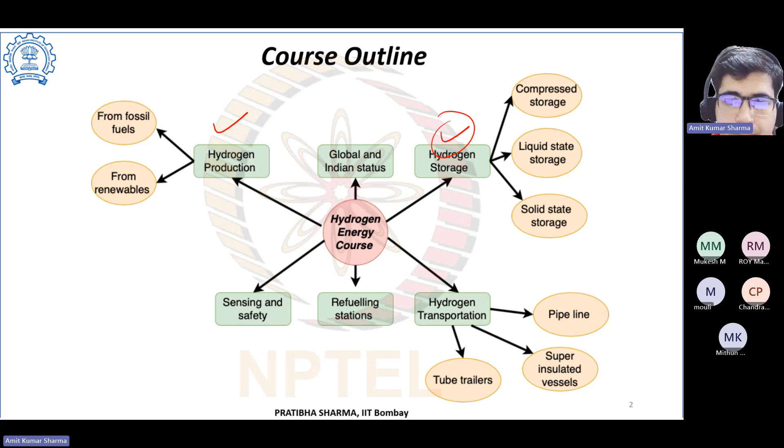Question number 1: what is the density of liquid hydrogen at 1 bar? A) 80.1 kg per meter cube, B) 65.3 kg per meter cube, C) 70.9, D) 0.089.

0.089 — okay, D, we have one answer. Anybody else? So it's C, 70.9. Nice, so we have another answer. Now we have two answers, so you should both think about the question because we have two answers, but only one is correct. Yeah, it is C. Okay.

I think you have identified your mistake. Correct, yes, it was liquid. So always read the question carefully. What is the density of liquid hydrogen? It is mentioned liquid hydrogen at 1 bar. So what about option D? What is that density for? Gas, yeah. So this one will be for the gas at 1 bar, or you can say NTP. But it is mentioned about the liquid hydrogen, so we know that this option is not correct.

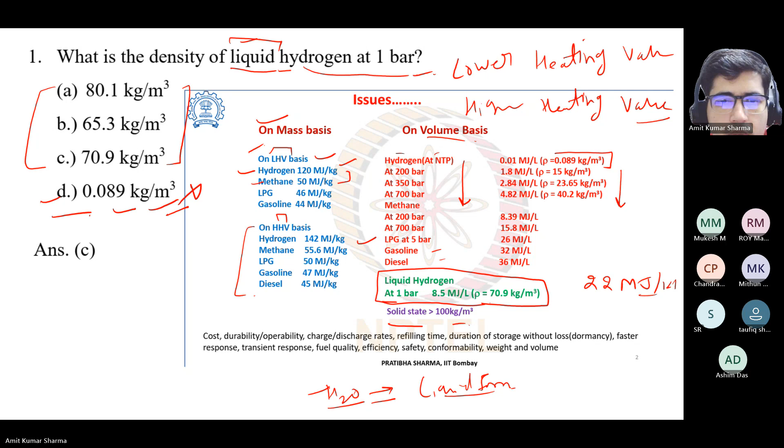Similarly, you can see the density for gasoline and diesel. For liquid hydrogen at 1 bar, the density is 70.9 kg per meter cube, and for solid state it is 100 kg per meter cube. The density of gasoline is 32 megajoule per liter and 36 megajoule per liter.

So what do you think from this mass basis and volume basis? What is your understanding after getting the knowledge of density on mass basis and on volume basis? What do you think about hydrogen now? Anybody? The data is in front of you, so you know the calorific value on the mass basis and density on the volume basis. So what do you think? What is the understanding based on this data?

Handling hydrogen, at NTP or any other pressure, is not as efficient as any other comparative liquid fuel. Okay, anybody else?

On the energy side, when the pressure increases from 200 to 700 bars for hydrogen, the energy also increases on a volume basis, per liter basis. At 200 bar it is 1.8 megajoule, at 700 bar it is 4.82 megajoule per liter, and density also increases.

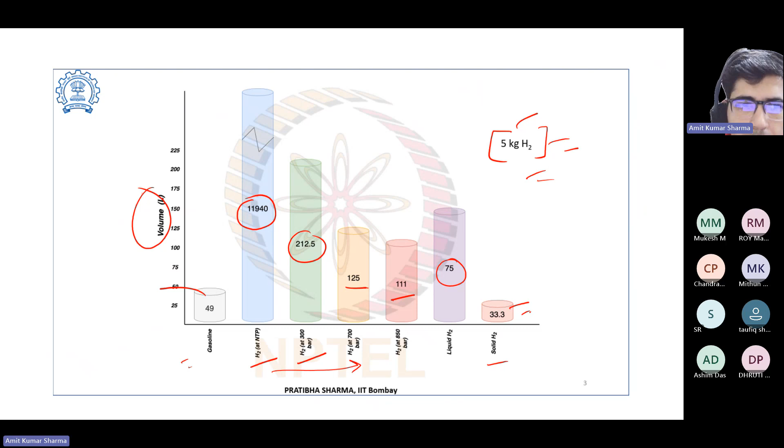If you have hydrogen at 300 bar, it's reduced to 212.5 liters, then 125, then 111, and liquid hydrogen it's 75, and solid it's 33.3 only. So the volume is reducing - as you increase the pressure, the volume reduces and you improve the density. But still, compared with gasoline, it's much lower.

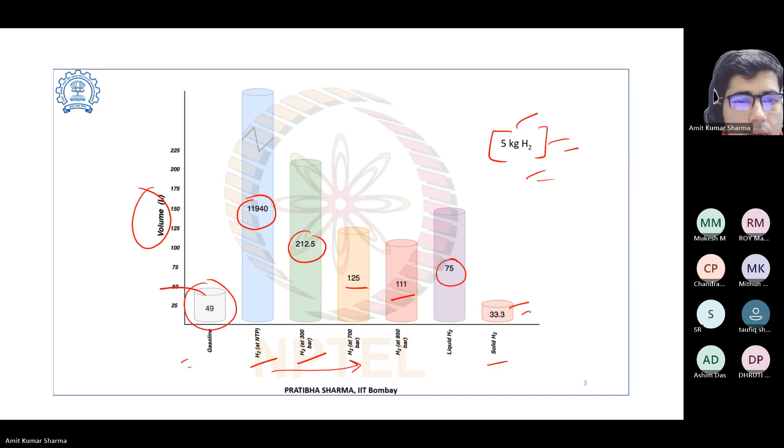So now question number 2: the operating pressure range for storing hydrogen in salt cavern are selected with reference to which of the following pressure - lithostatic, atmospheric, hydrostatic, or vacuum?

Sir, lithostatic pressure. Okay, we have one answer. Anybody else?

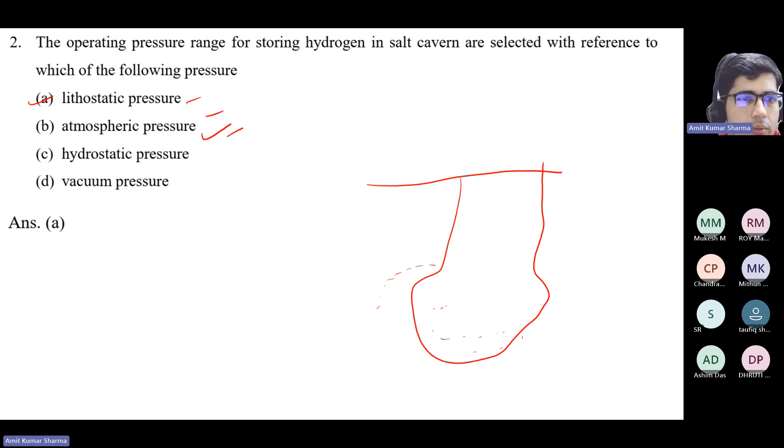So the correct answer is A, lithostatic pressure. As we are storing in the salt cavern, what is the meaning of lithostatic pressure? Atmospheric pressure is 1 bar, roughly 1.01325 bar, while lithostatic pressure is the pressure exerted by the salt material or sediments - that solid material applies pressure to the stored gas. Because suppose this is the earth's crust and we are storing hydrogen here, all the rocks surrounding it create some pressure, similar to hydrostatic pressure in fluids. That is lithostatic pressure. Atmospheric pressure we all know, vacuum pressure we know, so the correct answer is A.

So now let's go through some history of underground storage. In 1915, Ontario gas field was used for natural gas. Underground hydrogen storage has similarities with underground natural gas storage, because UHS is similar to natural gas storage. In 1976, there were no insurmountable problems with UHS, similarly in 1979 and so on. Recently in 2020, Shi et al.

investigated the potential of storage of a hydrogen and natural gas blend into a depleted gas oil reservoir, which has already been used for natural gas storage, through a series of experiments. So recently they did some experiments to use a depleted oil and gas reservoir, which was earlier used for natural gas, to store hydrogen.

Also in 2020, Narayanamoorthy et al. proposed a normal wiggly dual hesitant fuzzy set for UHS site selection based on five criteria, including technique of operation, investment cost, social, economic, and risk factors. So you can search these papers from these authors to read more about recent developments in underground hydrogen storage.

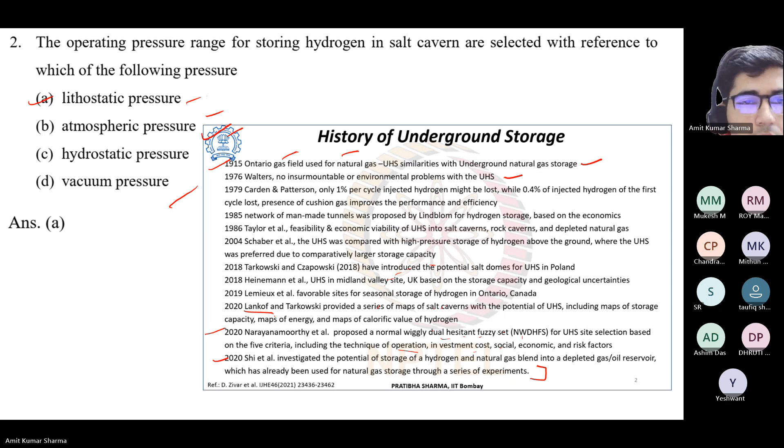So what are the advantages and disadvantages of underground hydrogen storage? Advantage: we can have long-term, large-scale storage because underground we have so much space available, like in oil wells, salt caverns, and all. So we can store a lot of hydrogen. It's economical because the space is already created there.

You just need to do some extra work, and it's economical in the sense that if you wanted to create that much space on the earth's surface, to maintain the pressure, to develop it and all, it would need huge investment. But for underground hydrogen storage, it's economical.

It's a proven technology. We have seen that since 1915 we have stored natural gas and all. So it's proven technology, it can give good performance, less microbial contamination, and it's safe.

It also has some disadvantages: integration challenges, need for high purity hydrogen. Because if you are storing hydrogen in a depleted oil well, the surface of that well can contaminate the hydrogen. There can be some reactions.

Availability of such geological structures - we all know it is not available everywhere, so it is a big issue regarding availability. Also safety: you need to monitor it properly, and have a proper regulatory framework, because if you are storing a huge amount of hydrogen, there will be some regulatory framework, so you need to comply with all those frameworks.

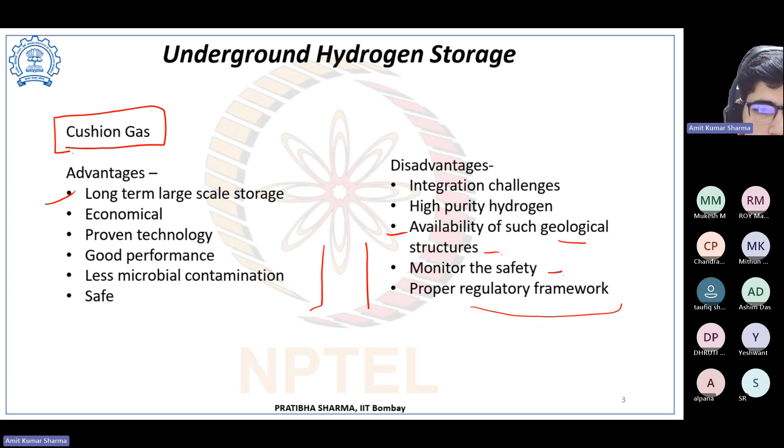Right, right. So basically, suppose this is your underground cavity where you want to have hydrogen storage. Earlier it was used for, like, a coal mine or an oil well, or a salt cavern. If you directly pump the hydrogen inside, the hydrogen will fill this cavity. Then maybe it will react, because these walls have some kind of chemical, so they can react.

There can be some biochemical reaction, maybe some microbes also, because it's a very old geological structure, so maybe there are some microbes, some kind of chemical, so there can be reactions. These reactions can introduce impurities into the hydrogen, so when you pump it out, those impurities can also come out. And also, we know the challenges with hydrogen storage.

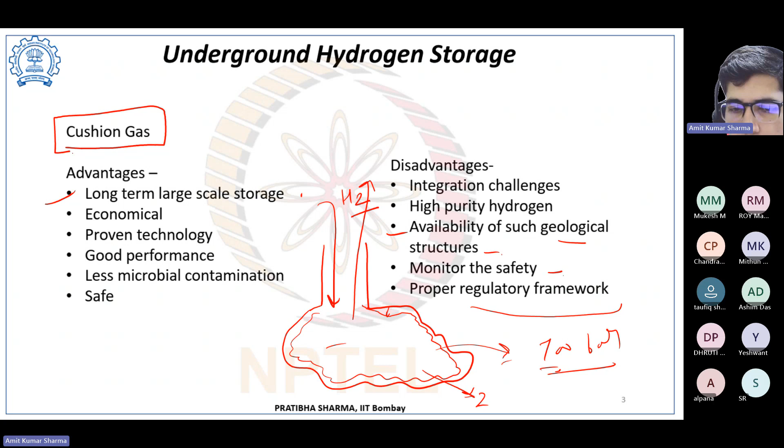Okay, so we need to compress it to a very high pressure. Suppose it's totally empty and it's a very large space. To have 700 bar pressure in that large space, you need to pump so much hydrogen. But suppose you don't have that much hydrogen, then this space won't be able to maintain this pressure. Maybe it can only, suppose you are having x tons of hydrogen, so you pump x tons of hydrogen in this cavity, it can go up to 200 bar only. But you need to have it at 700 bar, that's economical to you. Otherwise you need to compress it again.

So then what can we do? To avoid these disadvantages like contamination, and to maintain the pressure, we can first add a different gas in this cavity. We can add nitrogen. So first fill this cavity with that gas, so that gas will occupy some space and some volume.

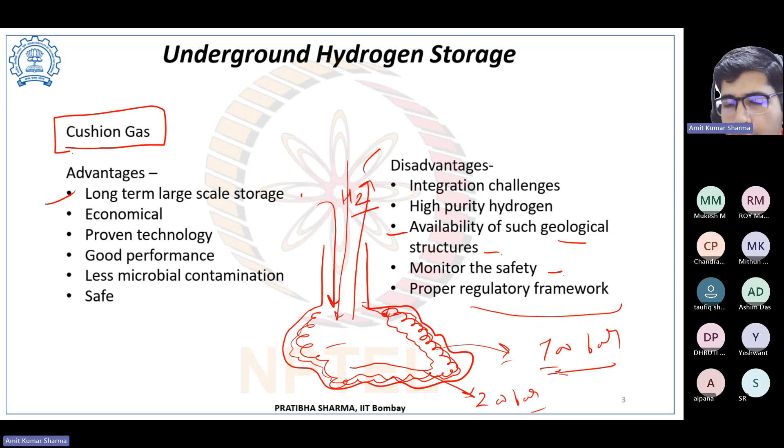Now you can introduce hydrogen. Hydrogen is a lighter gas, so the other gas will remain near the boundary, because it's heavier compared to hydrogen. So hydrogen will be in the middle. Now you can compress it, because already so much space has been occupied with nitrogen or any other cushion gas. So you need a smaller space and can pump more volume of hydrogen. Now you can go up to 700 bar or larger. So this is the benefit of cushion gas, and it also helps in the pumping, since you have larger pressure it will help, and it has some other benefits too.

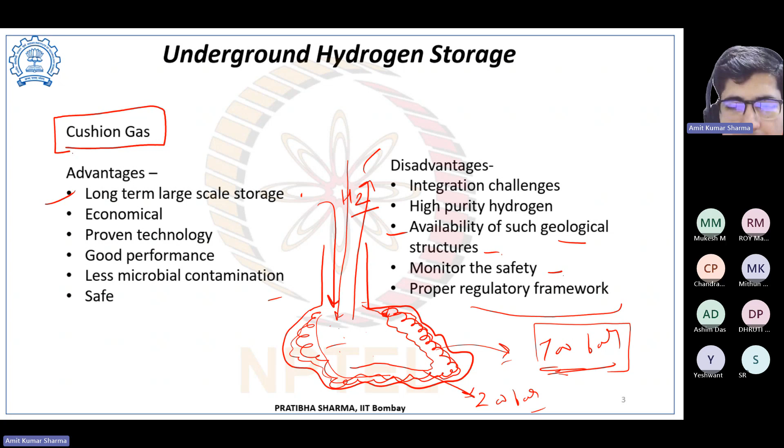So when we are having underground hydrogen storage, there are some parameters for site selection, like we need to see the capacity, security, physiochemical, geo and biochemical challenges, and economics. We need to look at these.

What are the challenges? Location suitability, capacity, reaction and contamination as we discussed, hydrodynamics, leakage—hydrogen is very light so there can be some leakage also—water production, environmental issues, and efficiency of process. So these are the challenges for underground hydrogen storage.

So further research and upscale pilot projects are needed. As we have seen in history, recently in 2020, two or three authors have done some experiments on hydrogen storage, and prior to that others have already done experiments. So still, more research is needed in this area.

Hydrogen storage site selection methods need to be expanded to less well understood regions. Improved monitoring procedures are required to assure that hydrogen can be stored safely, so we need to improve those monitoring procedures. Realistic simulation models are needed to predict the performance of hydrogen storage, and further refine to model the process completely. So these are the areas where we need to work.

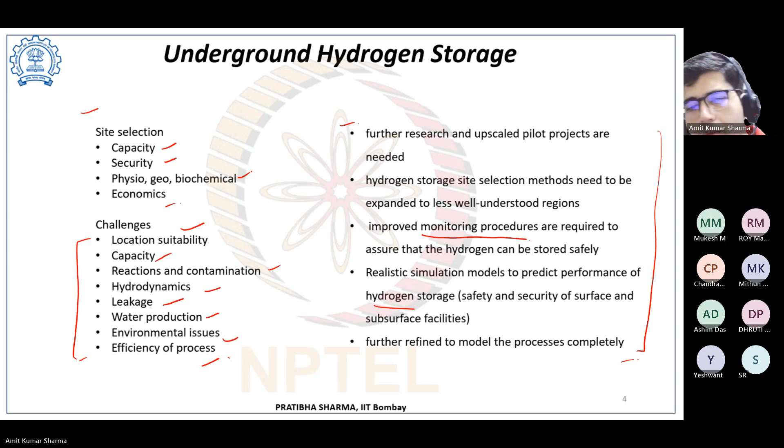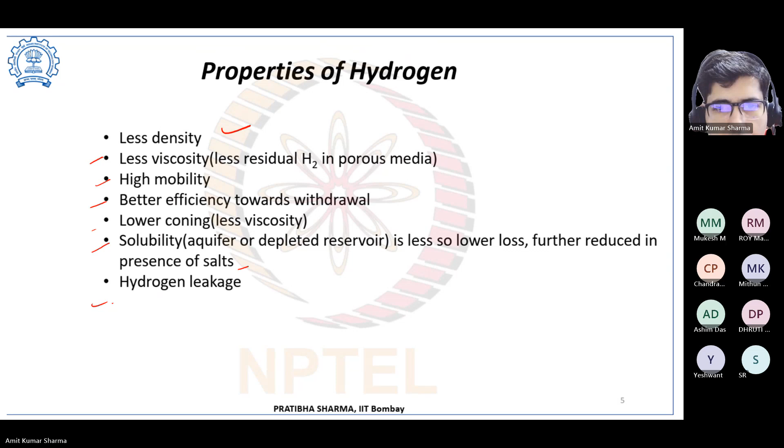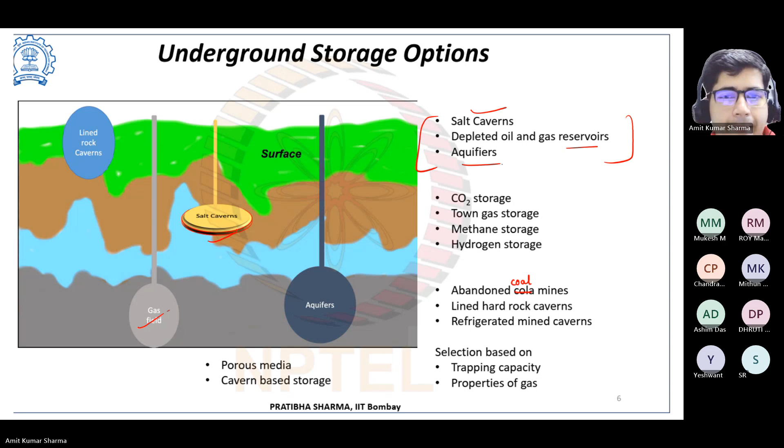So you can see the options for hydrogen storage: salt caverns, depleted oil and gas reservoirs, and aquifers. These are the locations where we can store hydrogen. These locations are not only used for hydrogen storage, but they can also store CO2, and be used as town gas storage and methane storage. We can also use abandoned coal mines, lined hard rock caverns, and refrigerated mined caverns. So the selection of location will depend on the media, the cavern based storage, trapping capacity, and properties of gases.

The property of gas is important because, as discussed, you have a layer and you need to study that. Suppose if you are storing a gas that has direct reaction with the inner surface of your cavity, then that can contaminate the gas. So you need to look into that, you need to understand the properties of the gas.

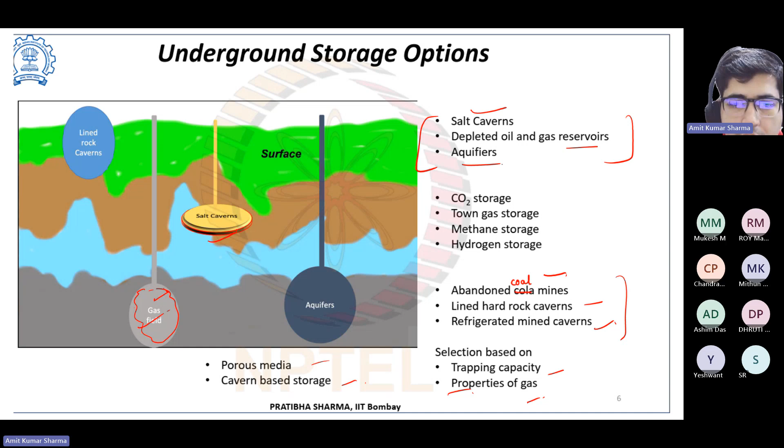Now let's go through the salt cavern. It's mostly a cylindrical, artificial pit in thick underground salt deposits, built from the surface by injecting water in a controlled manner into a well in the salt rock. This is called solution mining. Based on the requirement and technical possibility, it can be built up to 2000 meters deep, with 10 lakh cubic meter volume, 300 to 500 meter height, and 50 to 100 meter diameter, enabling storage of large quantities of gas. Pressure during operation lies in the range of 30 to 80% of the lithostatic pressure.

The specific geological conditions such as tightness, the favorable mechanical properties of salt, and its resistivity to chemical reactions. So we need to see this. Suppose your salt is reacting with the gas, then it's not good, so you need to see that also. Viscoplastic attributes of evaporitic rocks help with their better sealing function.

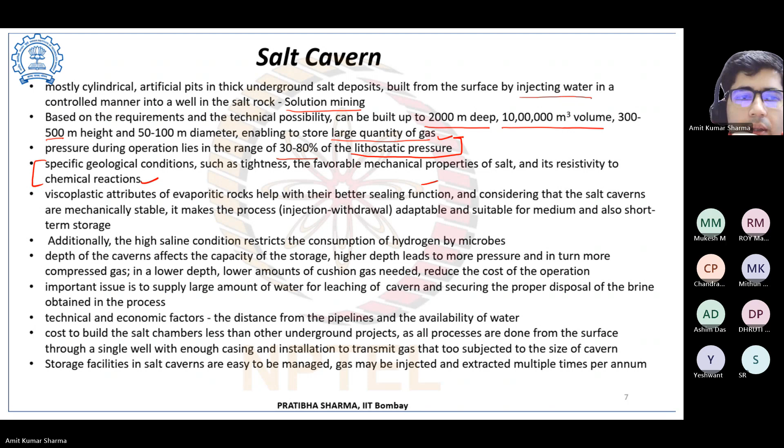Because hydrogen is a very light gas, if there are small cracks in the rock, and that crack is connected to some other cavity, so there can be some leakage. So you need to also consider that.

Additionally, the high saline condition restricts the consumption of hydrogen by microbes. Depth of the caverns affects the capacity of storage. Higher depth leads to more pressure and in turn more compressed gas. Because we know if we are storing hydrogen, we need to have more pressure. So higher depth can have more pressure because higher depth will have a higher lithostatic pressure, and we know that we can go up to 30 to 80% of that pressure.

In a lower depth, lower amounts of cushion gas needed reduce the cost of operation. So an important issue is to supply large amounts of water for leaching of the cavern and securing the proper disposal of the brine obtained in the process.

Technical and economic factors: the distance from the pipelines and the availability of water, cost to build salt chambers less than other underground projects, as well as all processes done from the surface through a single well with enough casing and installation to transmit gas, subject to the size of the cavern. So these things are about the salt cavern.

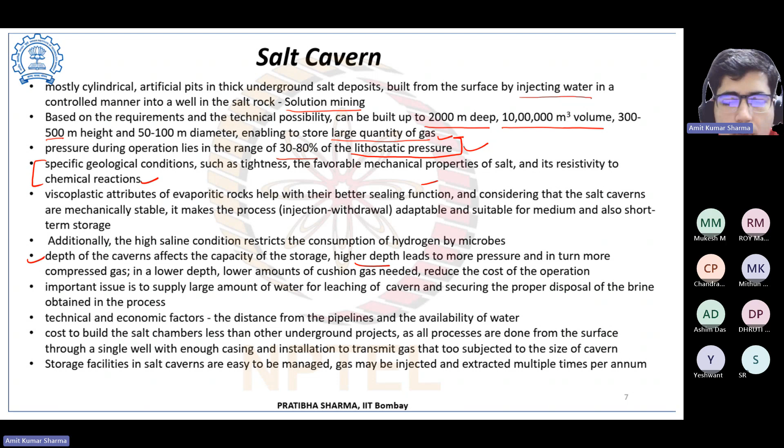Now the aquifers. These are the porous and permeable media where their pore spaces are filled by fresh or saline water, found all over the world, making them a good option for underground hydrogen storage. Now there are some conditions for deep aquifers.

It should have good reservoir characteristics of the host rock. Second, the presence of an impermeable layer to prevent migration of the gas being stored. So there should be an impermeable layer, otherwise there will be leakage of the gas.

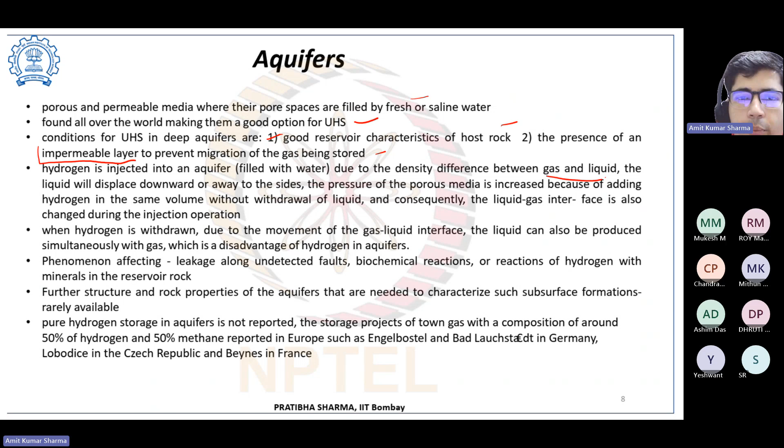Hydrogen is injected into the aquifer filled with water due to the density difference between gas and liquid. The liquid will displace downward or away to the sides. The pressure of the porous media is increased because of adding hydrogen in the same volume without withdrawal of the liquid. So as we discussed earlier, if you are having this cavity with liquid already, and if you push the gas, your liquid is heavier so it will move towards the side, and you can have less volume, so you can store more hydrogen at higher pressure.

When hydrogen is withdrawn, due to the movement of the gas-liquid interface, the liquid can also be produced simultaneously with the gas, which is a disadvantage of hydrogen in aquifers. So when you're pumping out, some part of the liquid can also go with the hydrogen.

There can be biochemical reaction, leakage, or reaction of hydrogen with the minerals in the reservoir rock. The further structure and rock properties of the aquifers needed to characterize such subsurface formations are rarely available.

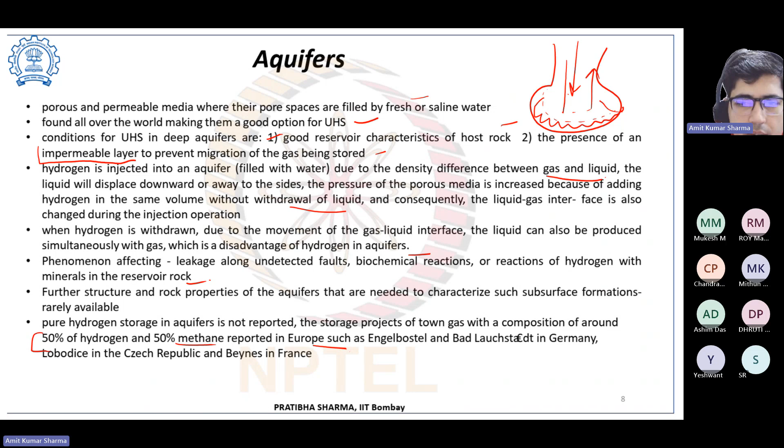So as of now, pure hydrogen storage in aquifers is not reported. The storage projects of town gas with a composition of around 50% hydrogen and 50% methane have been reported in Europe, in Germany, in Czech Republic, and in France.

Now the depleted oil and gas reservoirs. So hydrocarbon bearing geological trap is kept with an impermeable layer, cap rock, and is supported with an aquifer from the bottom or edges.

So it's the most appropriate option for underground gas storage due to their well identified geological structure, good tightness and integrity of their cap rock, and pre-existing necessary surface and subsurface installation. Due to these things, they are suitable. Depleted gas reservoirs are well characterized, information known. The tightness of the cap rocks of depleted gas reservoirs has also been proved.

The existence of the remaining gas in a depleted gas reservoir is considered an advantage because it can play the role of cushion gas. So if you are having a gas reservoir, there will be some gas already available that can be used as cushion gas, which can reduce the cost. But it is also a disadvantage if the remaining gas is able to reduce the purity of hydrogen.

But if the amount is so much and there can be some reactions, it's not good for the purity of hydrogen. When planning and designing facilities for UHS in a depleted gas deposit, it is important to cease gas extraction at an optimum time, allowing storage to be created in a shorter time and at a lower cost. So these are the things you need to consider.

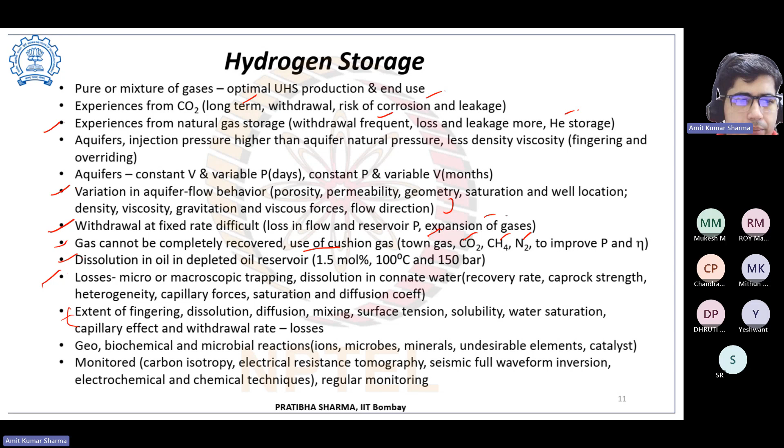So geological, biochemical, and microbial reactions can happen in underground hydrogen storage due to ions, microbes, minerals, undesirable elements, and catalysts.

So you need to have regular monitoring using carbon isotropy, electric resistance tomography, seismic full waveform inversion, electrochemical and chemical techniques. So these techniques you can apply for regular monitoring of underground hydrogen storage.

So in summary, we can store medium to long term, large scale storage. Salt caverns have been most promising, though restricted by geological location, with small capacity. Porous geological formations have capacity and local positioning considerations - depleted oil and gas fields you can use, aquifers are still under research.

So we have seen that there can be so much losses, so these have to be minimized. Site selection, understanding, continuous monitoring, and simulation to understand modeling of the process are required. So these are the challenges in UHS.

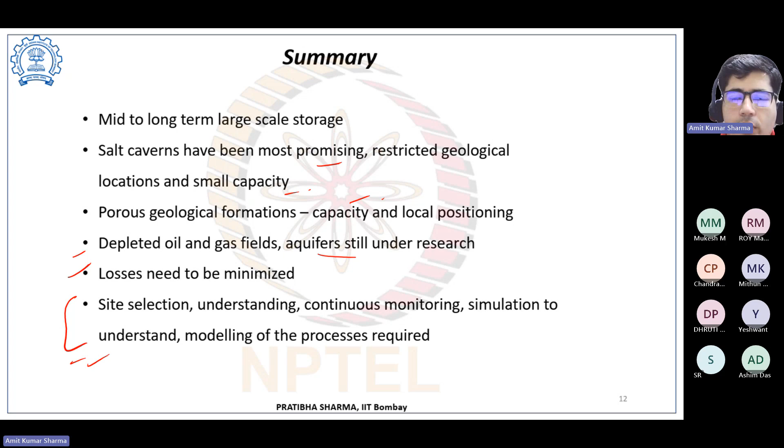Now next question: What are depleted oil and gas reservoirs?

Option A: carbon dioxide bearing geological trap kept with impermeable rock. Option B: hydrocarbon bearing geological trap kept with impermeable rock. Option C: brine bearing geological trap with kept impermeable rock. Option D: hydrocarbon bearing geological trap with kept permeable rock.

Yeah, it is B, hydrocarbon bearing geological trap with capped impermeable rock. Anyone else?

So we can solve this question from the question itself. It is given as depleted oil, so oil means it will be hydrocarbon - so it will be either option B or D. Now we know that when storing in underground hydrogen storage, the cap rock should be impermeable, otherwise there will be leakage. So compare option B and D: in D, it's given that the trap will be kept with permeable rock, so it can permeate the hydrogen, causing leakage. So it's not good - it should be kept with impermeable rock. The answer is B.

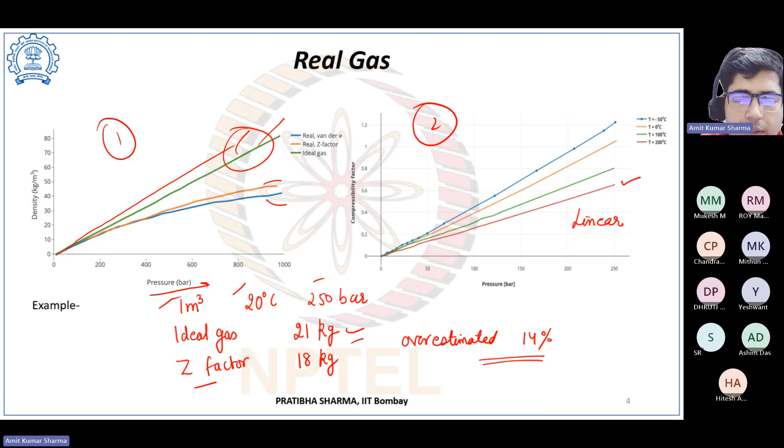Suppose you are storing a gas at 1 meter cube, 20 degrees centigrade, at 250 bar. If you consider ideal gas behavior, the mass of that gas will be 21 kg. But if you apply the Z factor and consider real gas, it will be 18 kg.

So basically, you are overestimating the mass value by 14% if you consider the gas as an ideal gas, but in reality it is not ideal. So you are overestimating the value of the mass by 14%.

So this is showing the value of Z, the compressibility factor, with pressure. As we increase the temperature, the graph comes down, the slope is decreasing. You can see it for minus 50, then 0 degree, 100 degree, and 200 degree centigrade.

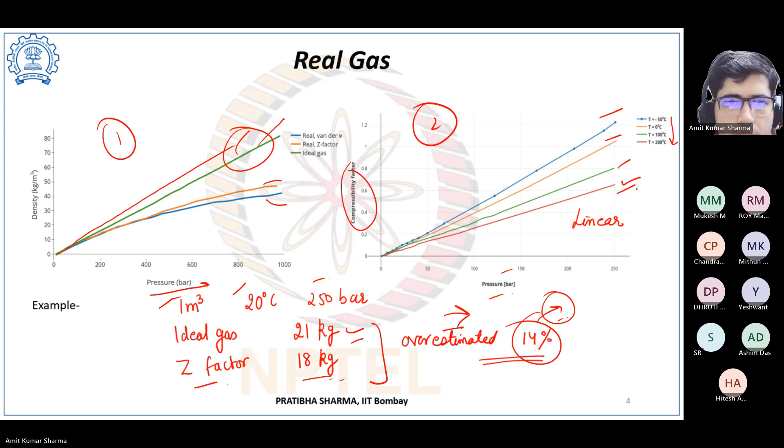Now a numerical: what will be the mass of hydrogen stored in kg in a hydrogen compression process, at a pressure of 300 bar, temperature 298 Kelvin, volume 1 meter cube, considering an ideal gas equation and a real gas equation. If considering real gas, the Z value given is 1.1879.

Try to solve this. Use equation of states for ideal gas and real gas with value of Z. Be careful with the units.

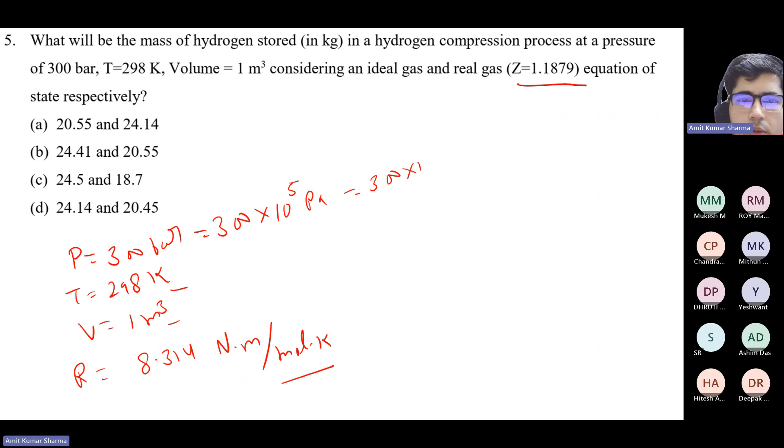So 1 Pascal equals 1 Newton per meter square, so it will be 300 into 10 to the power 5 Newton per meter square. Now the value of M is PV upon RT. Now every unit is in sync, so now put these values: 300 into 10 raised to power 5, volume 1, on R 8.314, T 298. Now solve it.

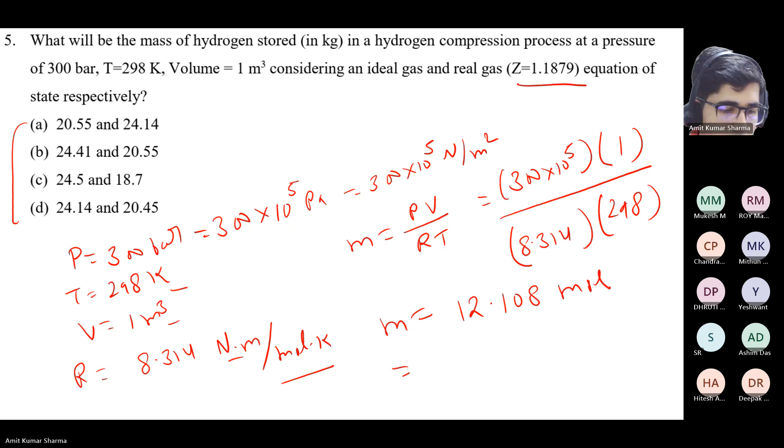So yeah, kilopascal, we have to convert into kilopascal. So 10 we have to divide again by 1000, so it would come to 12.108. It's correct, 12.108 mole. Is it coming correct or not? Yes, yes it is correct. Can you please say how? Only thing is that Pascal and kilopascal we have to convert.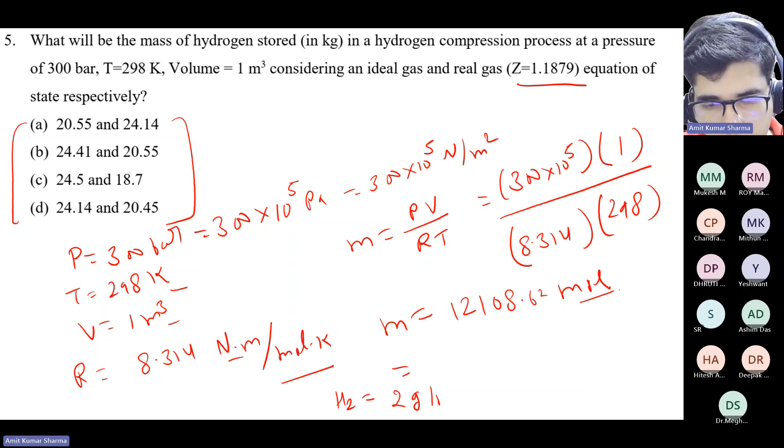24217, sir, 24, 1, 2, 217. Okay, 24217, 2, 4, 2, 1, 7. It will be in grams.

Now see the question, we have asked in kg. So now convert this gram into kg. 24.2, so 24.21 kg. Now check the options. So 24.21, actually we have three options: 24.41, 24.5, 24.14.

So that's why we need the exact value of R, or the exact value of the molecular weight. If you take those values correctly, then you will have the exact right answer. So we have 24.21, so it will be near to this also, this also, so we need to check. Try to have the exact values, then you will get the right answer. The main purpose for this question is to show how we can check and solve this, we can check by the Z value. So it will be B. If you check the value of R, we can take R as 8.31446.

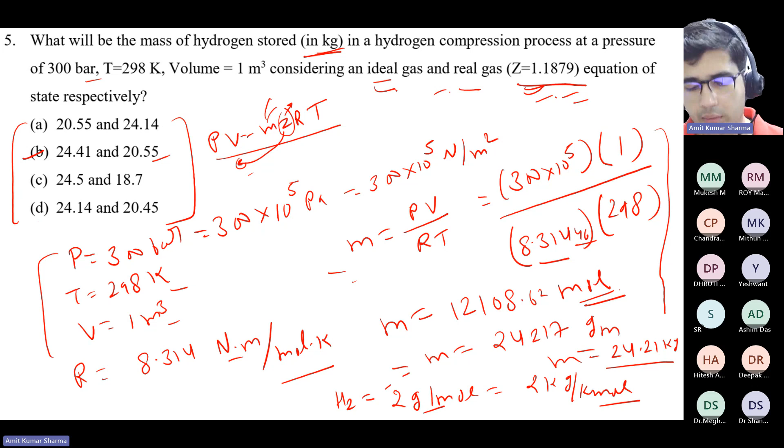So the correct answer is B. Next question.

The compression work is maximum for which of the following process? Isentropic ideal gas. Yes, so the correct answer will be D. The compression work is maximum for isentropic ideal gas compression.

So now let's go through more about isentropic compression process. The formula for the isentropic compression is gamma upon gamma minus 1, RT1, the pressure ratio P2 upon P1 raised to the power gamma minus 1 upon gamma, minus 1. So if you try to remember your basic thermodynamics from your bachelor's, then you can recall this formula.

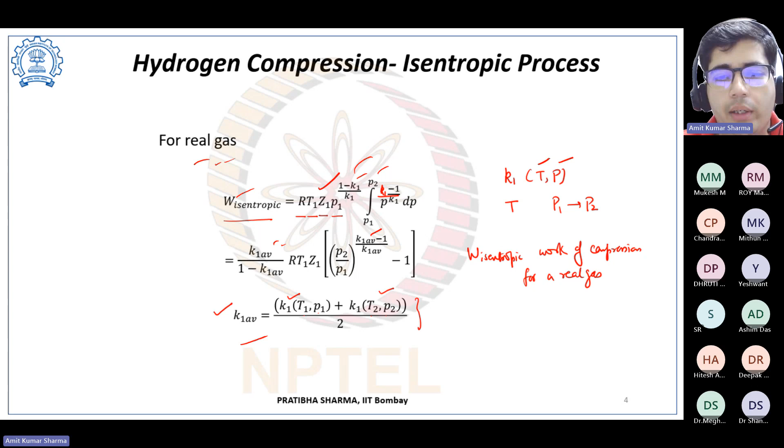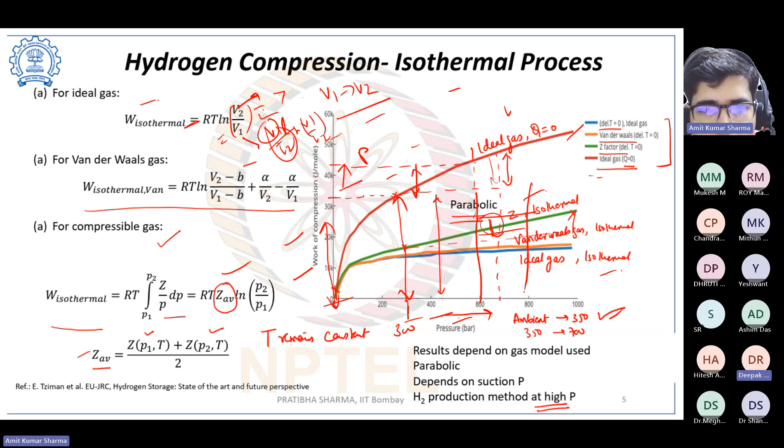So the actual work of compression lies between the theoretical limits - isentropic and isothermal. So the actual work will lie between this. Because we know that when we compress, the temperature will always increase, so any compression cannot be fully isothermal - there will be some heat transfer to the surrounding. So heat exchange with surrounding will be there, so it cannot be fully adiabatic. And also we know it's not reversible - there will be friction, viscous losses, so it's not isentropic. So the actual work will lie between these limits.

So if we are considering hydrogen compression, we know we cannot have a fully isothermal compression process, but we know the work will be minimum for isothermal compression. So if the temperature remains constant, what we can do is perform the compression in stages - in between we apply intercooling to reduce the temperature. We try to have more stages, each stage having intercooling to reduce the temperature each time, so that we have a kind of isothermal system in the compression, and the work will be reduced compared to direct compression.

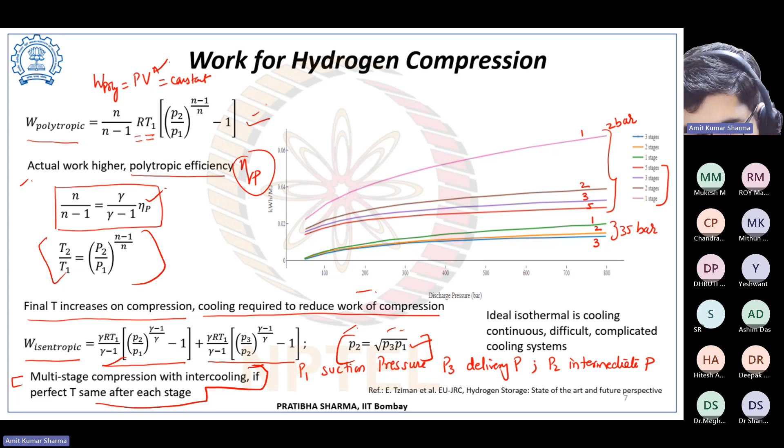Now compute the isentropic compression work, considering hydrogen as an ideal gas compressed from 10 bar to 80 bar at temperature 298 Kelvin, with value of R equal to 8.314 and gamma equal to 1.4.

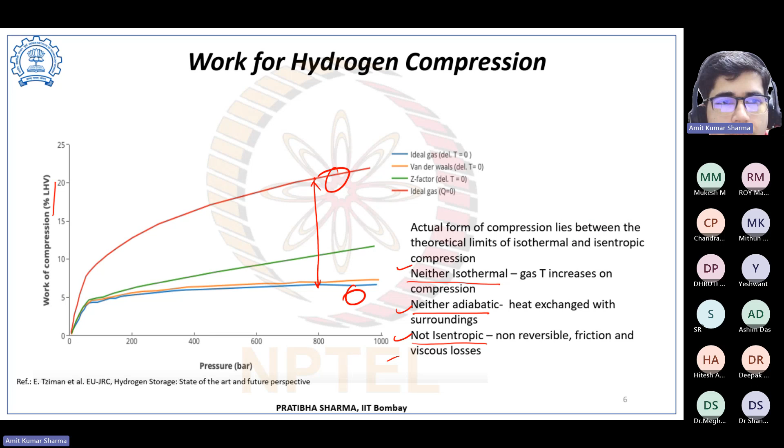Let me show you the formula again for isentropic work. So, gamma upon gamma minus 1, RT1, P2 upon P1 to the power gamma minus 1 upon gamma.

So here we have given the value of gamma, value of R we have given, T we have given. As P2 upon P1 is in numerator and denominator, the unit will be cancelled. Both pressures are in bar, so there's no need to convert into Pascal or any other unit. Directly you can put this value because bar and bar will cancel out.

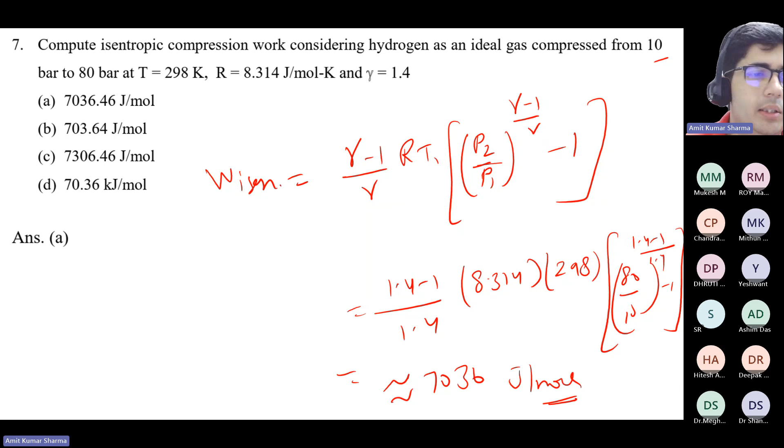Now identify the correct equation for isothermal compression work using the calorific equation of state.

So there is also a calorific equation of state. For isothermal compression, the work is given by H2 minus H1 minus T(S2 minus S1). So we directly take enthalpy in this case using the calorific equation of state. The correct answer is B.

Which of the process is considered for gas expansion process in turbine? Isenthalpic, polytropic, isentropic, or isothermal?

Isothermal, sir. Polytropic. Isentropic. Actually, it is isentropic, since entropy remains constant and the temperature is only reducing.

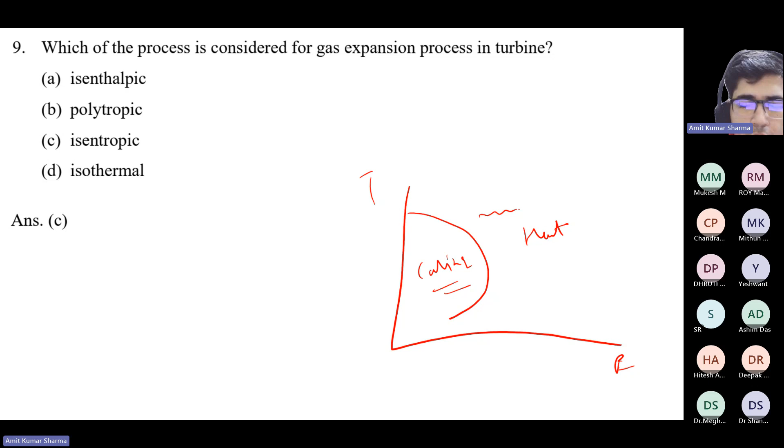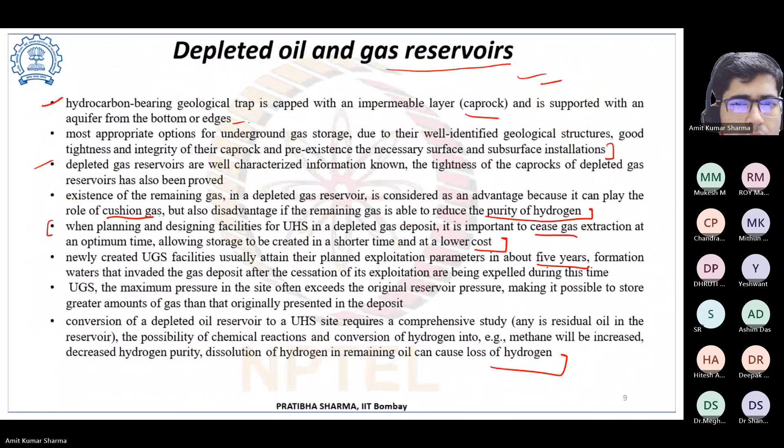So for hydrogen, I think we have already covered what was the value. Let me go back to the initial slide. For hydrogen, the value is 202 Kelvin, and it is negative at room temperature, so it will heat up. It will heat up, right, sir? Yeah, when you do the expansion.

So actually it's a very interesting phenomenon, the Joule-Thomson coefficient effect. Those who want to learn more about it should read about it. Thanks, sir.

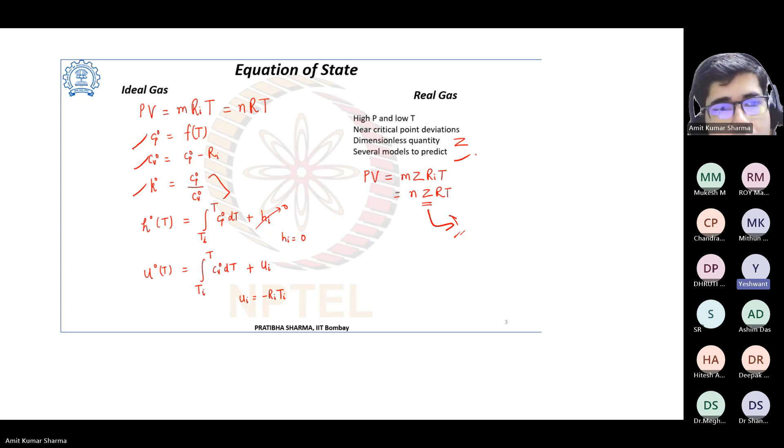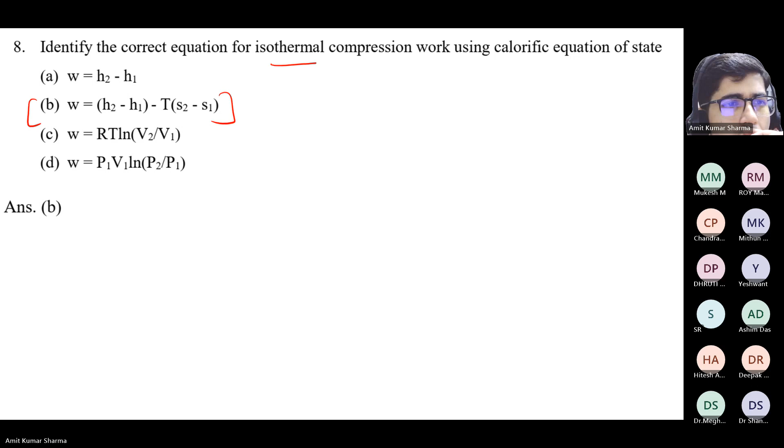So we consider isenthalpic expansion in a throttle valve, and isentropic expansion in a turbine.

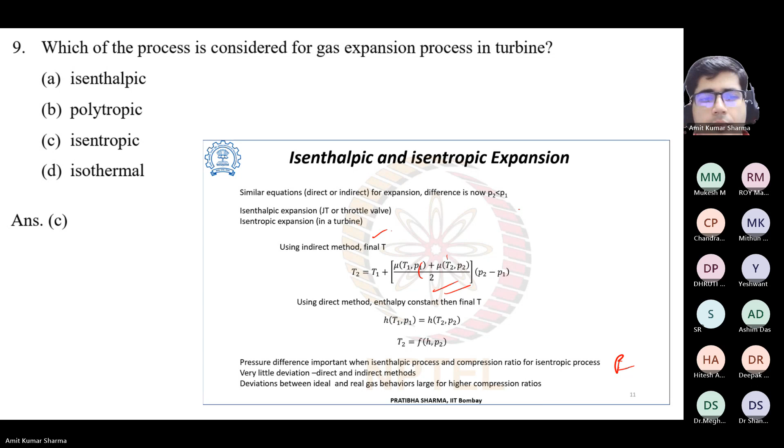The salt caverns are developed by which method? Solution mining, horizontal drilling, fracture rock structure, or heap leaching? Solution mining - yes, the correct answer is solution mining.

Cushion gas is injected into an underground hydrogen storage facility at which time interval of hydrogen injection? Along with hydrogen injection, after hydrogen injection, before hydrogen injection, or any time?

Before hydrogen injection. So what is the purpose of cushion gas? It provides pressure during the return, when the hydrogen is coming back, to help it come out. So we have covered that there are many benefits of using cushion gas, and this is one of them. We have to pump it before the hydrogen injection - only then does it fulfill its purpose. Otherwise, it's of no use.

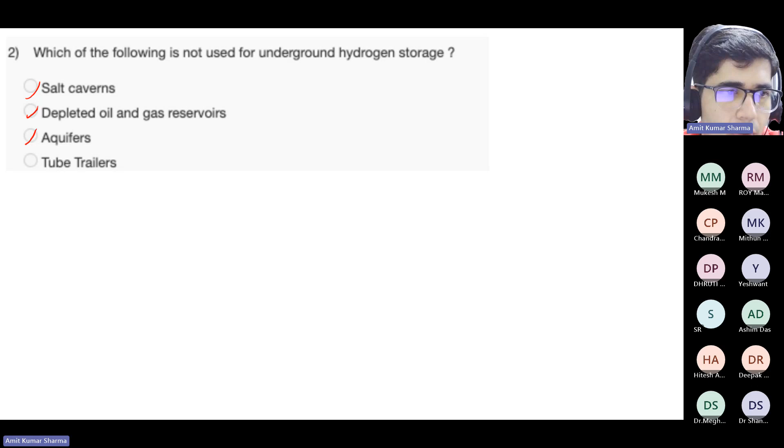Which of the following is not used for underground hydrogen storage? Salt caverns, depleted oil and gas reservoirs, aquifers, and tube trailers. Tube trailers - we have already covered salt caverns, depleted oil and gas reservoirs, and aquifers. So tube trailers are not used for underground hydrogen storage; tube trailers can be used for road transportation instead.

The Joule-Thomson coefficient is expressed by which of the following expressions?

C, sir. Yeah, so it's rate of change of temperature with pressure at constant enthalpy. So option C.

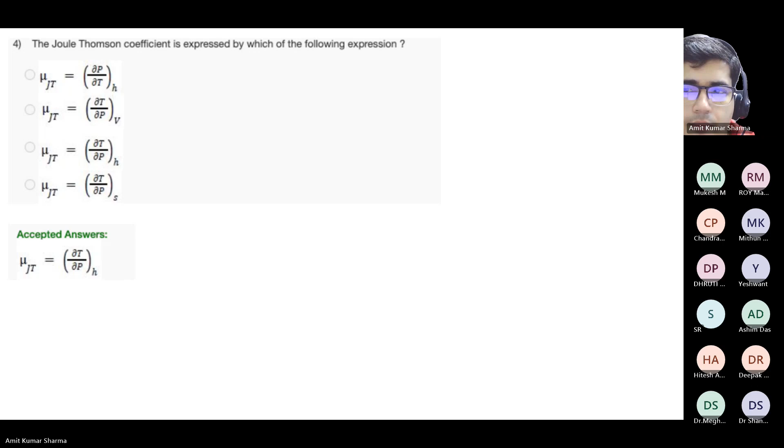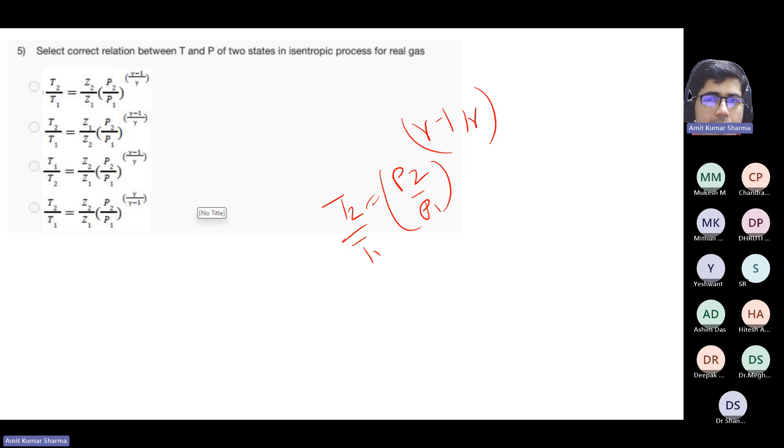Select the correct relation between temperature and pressure of two states in isentropic process for real gas. What is the relation for isentropic? T2 upon T1 equals to P2 upon P1 to the power gamma minus 1 upon gamma. So if we are using real gases, then we need to introduce the compressibility factor. So the value will be Z1 upon Z2 multiplied by P2 upon P1 to the power gamma minus 1 upon gamma.

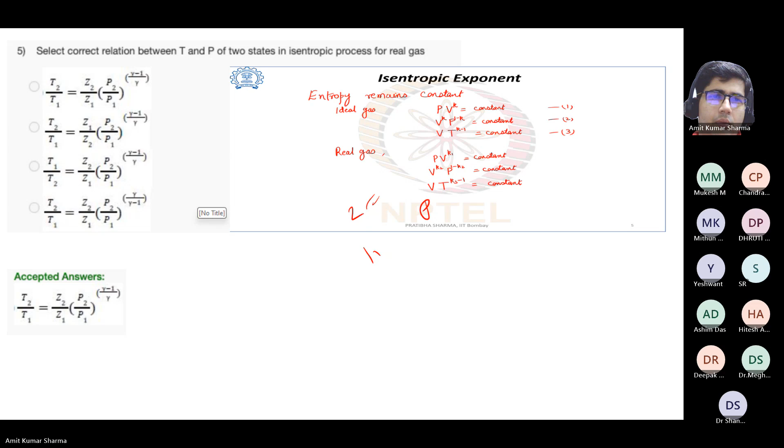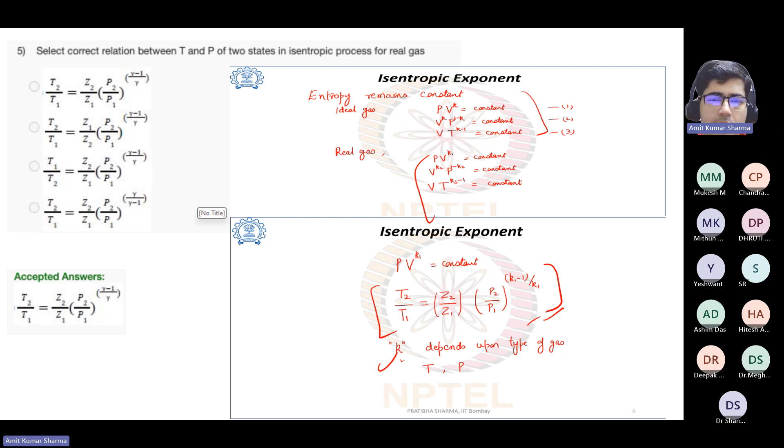So for isentropic, as entropy remains constant, for ideal gas you can consider relations like PV^k equals constant, V^(k) P^(1-k) equals constant, VT^(k-1) equals constant. But for real gas, PV^k1 equals constant, V^k2 times P^(1-k2) equals constant, and VT^(k3-1) equals constant. So for the isentropic exponent, this T2 upon T1 relation holds, where k depends upon the type of gas, temperature and pressure.

The required work of compression is minimum in which of the following thermodynamic processes: polytropic, isentropic, isothermal, adiabatic. Isothermal. So we have covered this already, that the compression work is minimum for isothermal and it is maximum for isentropic.

The answer is isothermal. The intermediate pressure in multi-stage compression with an intercooler is given by P2 equals square root of P3 P1, or P2 equals P3 P1 to the power 0.5. The correct answer is A.

The expansion of gas using the throttle valve or Joule-Thomson valve is...

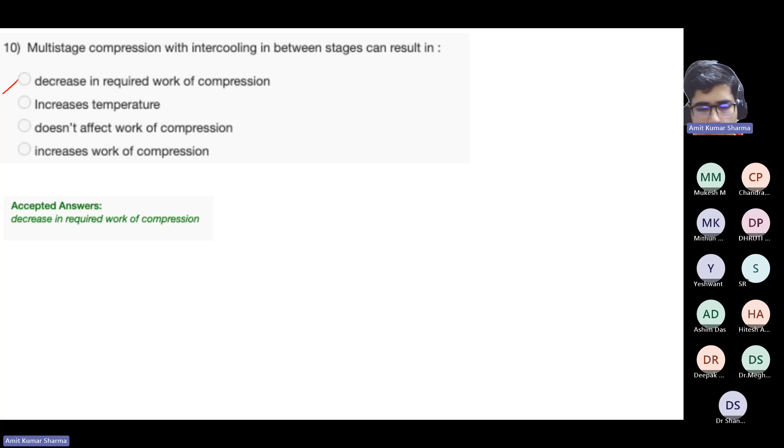So it's right. It decreases the required work of compression, because we know that the minimum work of compression is for isothermal process, but we cannot have a fully isothermal process, though we can try to achieve that by applying intermediate stages and doing intercooling. So actual process can be approximated by isothermal or isentropic process. Work of compression is minimum for isothermal process and maximum for isentropic, and multi-stage compression with intercooling saves the work of compression.

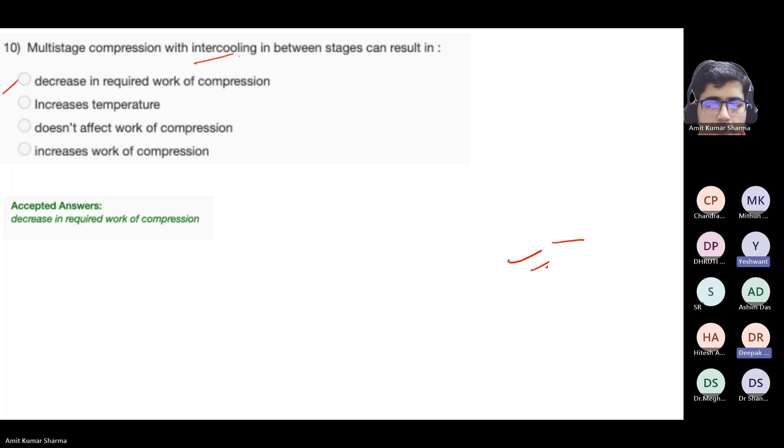Can you show me problem number 1 to 4, please? 1 to 4 only. Yeah, this one. So in this we discussed about the density of liquid hydrogen. Liquid hydrogen density is 70.9. This is based on data, not calculation.

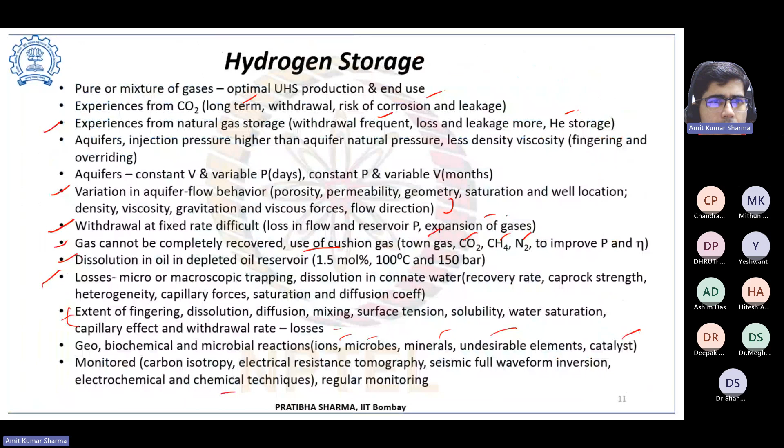Next, problem number 2: it's the operating pressure range for storing hydrogen in a salt cavern, so it is based on the lithostatic pressure. Third: what are depleted oil and gas reservoirs? As we know it's depleted oil, so it means it will be hydrocarbon, so it will be either option B or C. But we know that for any underground storage, the cap rock should be impermeable, not permeable. So option C will be wrong, option B is right.

Second answer is right. And fourth: for isenthalpic expansion of real gas with attractive molecular attraction, the Joule-Thomson coefficient is positive.

So I think we have 10 participants in our class today. Anyone, do you want to share something? Have you used this learning from this course in your industry or workplace? Is this course beneficial to you? Yes, sir, very much, recently commissioned.

Yeah, so Chandrasekhar, we have recently commissioned... Yeshwant? Yeah, Yeshwant, please. Sir, am I audible? Yeah, Yeshwant, you are audible, please.

We have recently commissioned a hydrogen refilling station for fuel cell electric vehicles, which produces hydrogen by cracking methane and purifying it. This is for the IOCL Faridabad R&D Center, where we are compressing it up to 550 bar pressure.

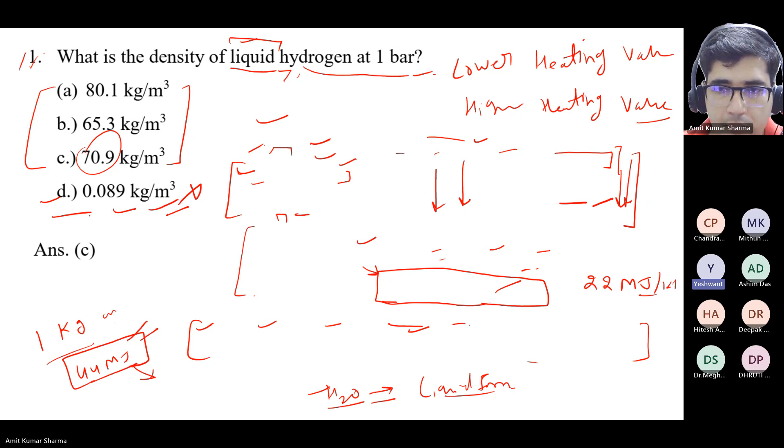You can do one thing - I don't have the direct list, but you can go to the MNRE website. We deal with electrolyzers, whether it's PEM or the pressurized alkaline type, so I can help the gentleman in case he needs. Can you just tell me your mobile number?

Please don't share your mobile number over this team because this is being recorded and will be on YouTube. It's better if you contact personally - in these teams I think you can message also, it's possible. You can connect me over LinkedIn. It's Yeshwant Natekar, JNK Renewables.

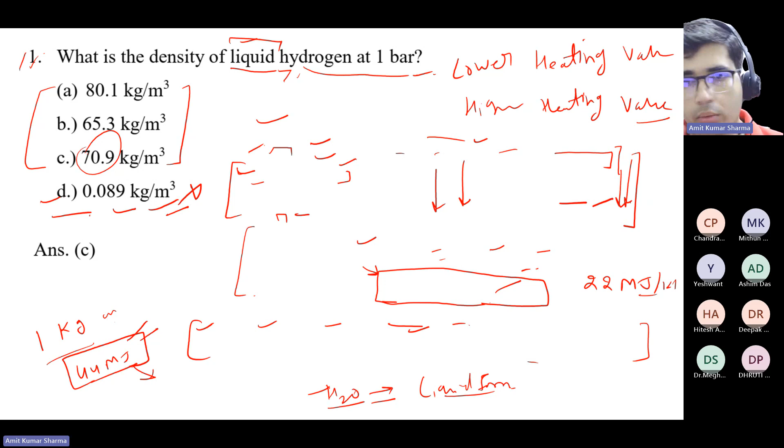So now we have the National Green Hydrogen Mission, I'm sure you will find information on the NGHM web portal. Try to find information on that MNRE portal - NGHM, National Green Hydrogen Mission. They have a separate portal where they've mentioned current projects, current manufacturers, those putting tenders and all - you can find details there. MNRE, Ministry of New and Renewable Energy.